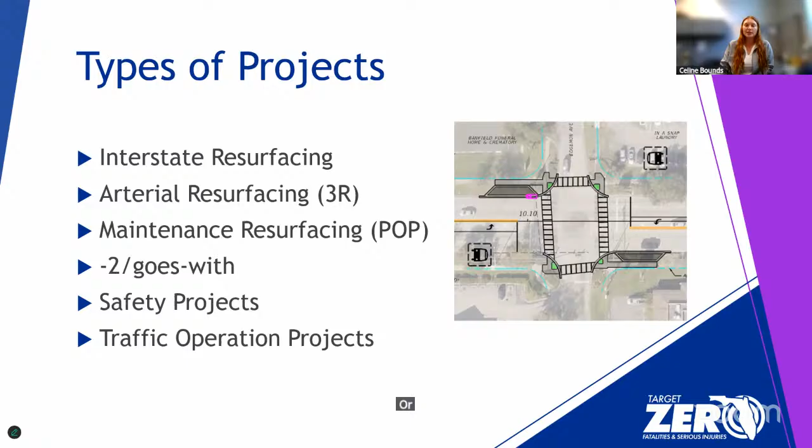Traffic operation projects are projects that have been identified and studied by a traffic ops group. These include things such as speed limit changes, new signalized intersections, directionalizing median openings, or installing signalized mid-block crossings.

Next, we're going to talk a little bit about our process and hit on some of those things we discussed in the last slide. So ISR is our interactive scope review meeting.

This meeting is made up of FDOT technical staff. These people are all our technical strong arms. We invite them to an in-person meeting where they can provide us technical feedback on our draft concept for our scope and highlight anything that we missed. It's important that we have this as an in-person meeting so we can discuss anything that has come up from our local agencies or direction from other departments, so they have the background as to why the scope is to whatever degree of safety that's presented.

Next, we have our TRM meeting, which is our technical review meeting. This is an in-person meeting for the purpose of engagement. It is made up of our cost center managers and our leadership. They are responsible for determining the scope of work.

So we present that safety and corridor review. Every project that is an arterial resurfacing, whether it is POP or 3R, our team conducts a safety and corridor review, which includes looking at crash data for correctable patterns that may be applicable to our resurfacing program.

And we present that information to our cost center managers and our leadership. We do have our traffic operations and our safety office in the room. They are able to inform us of any overlapping studies or may respond to some of the correctable crashes that we've noticed, and potentially partner with us to implement a traffic ops or a safety study into our project.

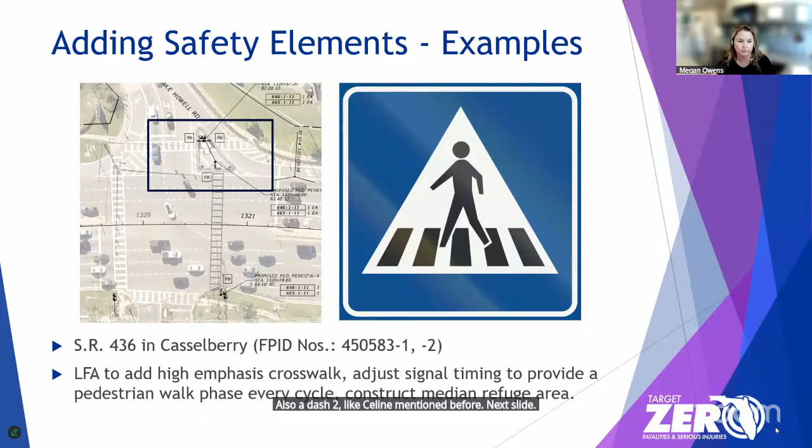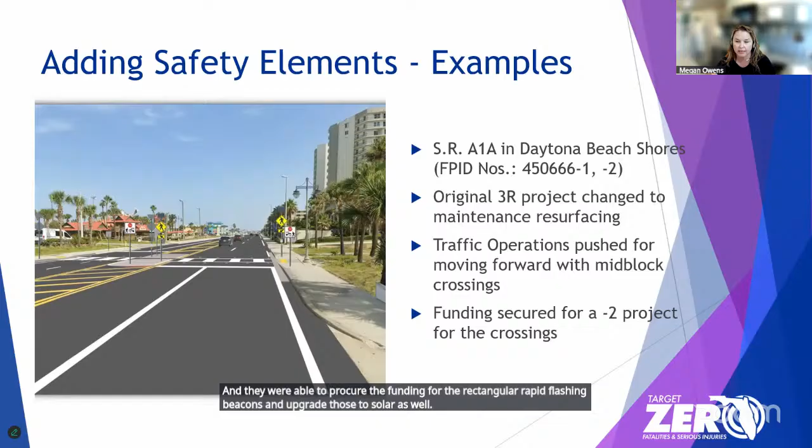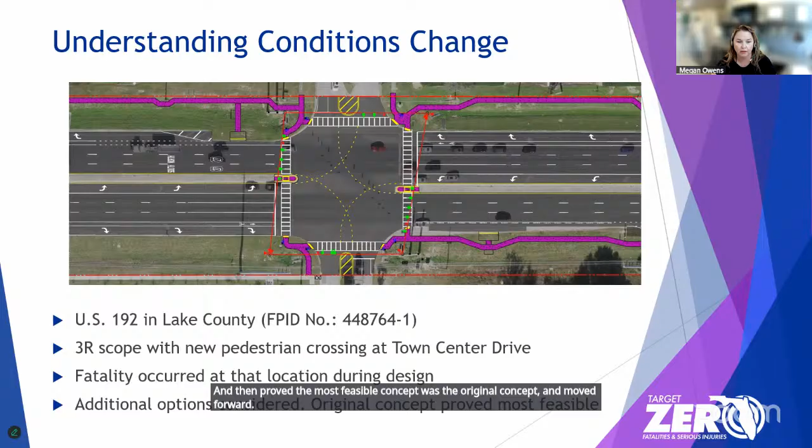To help ensure continuity from design to construction, pass the torch meetings are being conducted to ensure that construction staff and contractors understand the purpose of the project design and why specific features have been included. Additionally, our project managers will pass along any coordination or conversations that we had during design with the local agencies so that they can benefit from this knowledge as well. We understand that introducing new safety features can create some tension within the community, and FDOT is making an effort to stay involved with the community and incorporate those lessons learned from one project to the next.

During the design of a project, we continue to coordinate using tools like graphic renderings and videos of proposed improvements, and we also include the safety office to ensure that local agencies are informed and receive educational material about the safety features being included in their projects. All of this is done to make sure that the project fits the vision of the community and is successful throughout design and well after construction is complete.

And we would like to end on a safety second, because it takes just a second to be safe. Next week starts a speed enforcement campaign across the Southeast states called Operation Southern Slow Down. And that's it. Thank you.

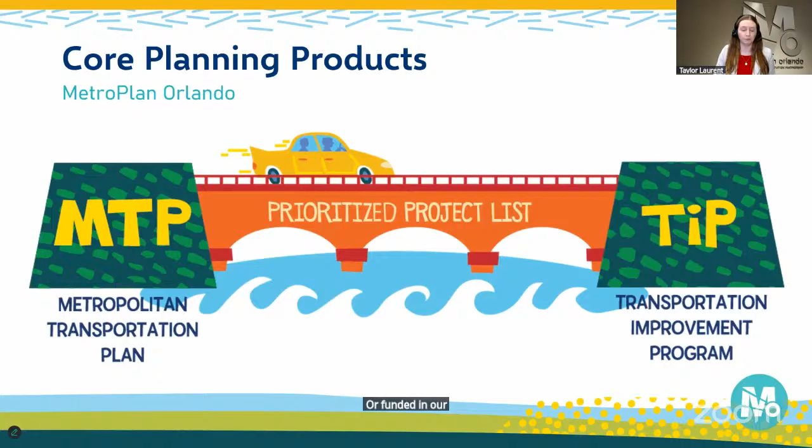Now, the 2050 MTP is made up of 5 basic parts. The first being how we use our transportation system today, looking at and evaluating the background data and existing conditions. From there, we need to develop shared goals and objectives for how we want the transportation system to be in 2050, those 25 years from now, and exploring the drivers of change or the future trends that will influence the path that we take to achieve those goals.

A lot of the technical analysis performed is intended to help us develop a transportation needs assessment to ultimately create a cost feasible plan outlining which of the identified transportation projects could feasibly be accomplished within this 25-year planning horizon. And of course, including public and agency participation and feedback throughout the entirety of the process, so that we have consensus when the plan is ultimately adopted by the MetroPlan Orlando Board.

That adoption will be later this calendar year. Now, safety has been included in our long-range planning process for decades, like I've mentioned earlier, but we purposefully ramped up our efforts in 4 key areas of the 2050 MTP to be able to incorporate the excellent work from our recently completed Vision Zero safety action plans.

That includes in our goals and objectives, technical analyses and needs assessment process, as well as in the development of the cost feasible plan and the funding policy used to create that. I'll be highlighting exactly how we've incorporated and elevated safety for these 4 topics over the next several slides.

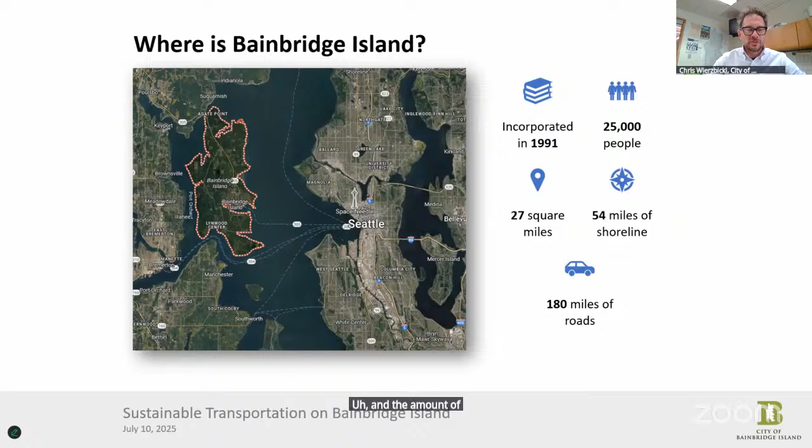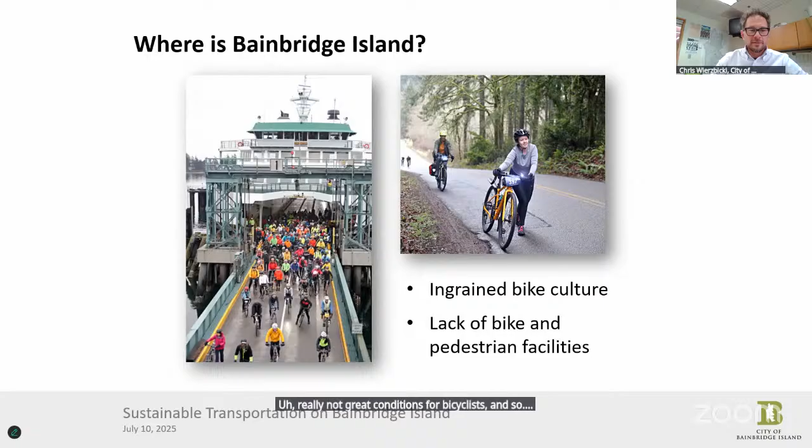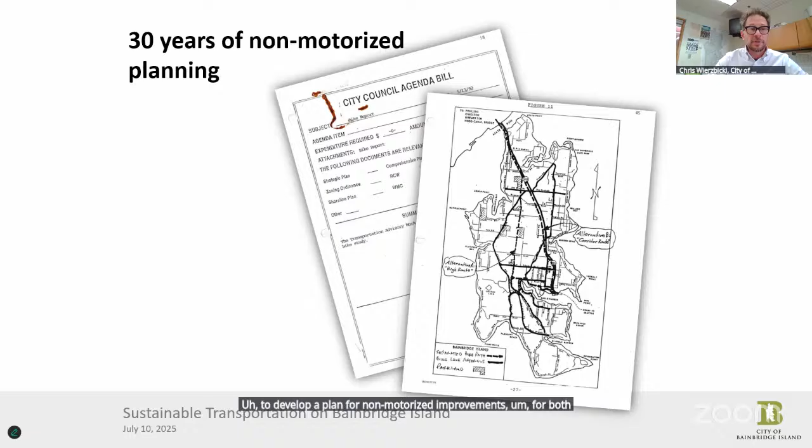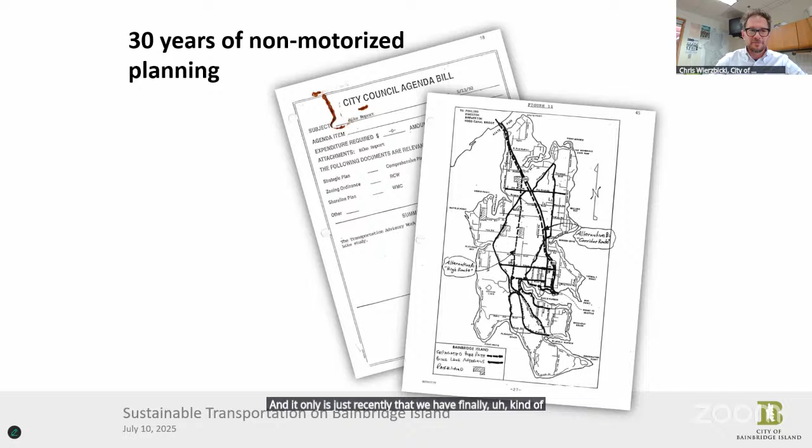And so we have been working on plans and process. We've been working since the city was established back in 1991 to develop a plan for non-motorized improvements for both bikes and peds and trails as well. What's interesting about our community is that we're not growing super fast, we're not building a lot of new roadways. So really, we've been having discussions about how to treat our roadways effectively and make them safer for a long time. It's only just recently that we have finally kind of agreed on a strategy, and that's a little bit of what we're going to talk about today.

The strategy that we developed was through a plan called our Sustainable Transportation Plan. We started that work in 2020, adopted it in 2022, with the vision to reduce carbon emissions and improve safety and mobility for all within the community. It has a focus on complete and connected networks that enhance the island's natural systems and articulates a pathway to implementation. That is a unique element of this plan that we're going to talk about in a minute.

We had lots of community engagement leading up to how this plan was developed. Of course, COVID happened right in the middle of our community engagement process, so we had lots of online meetings to get people involved. We did all-island mailers, and really tried to tap into advocates and others in the community who were passionate about this issue to develop the plan and put it together.

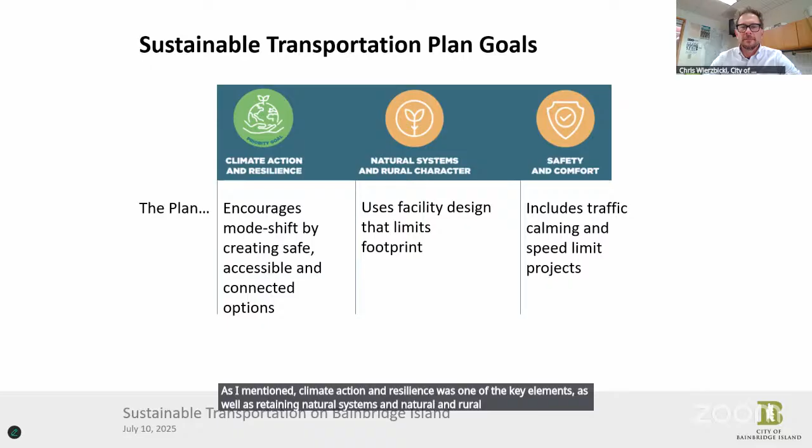The plan ended up having a number of goals that we developed with our city council prior to developing the full plan. This was the guiding elements of the plan. As I mentioned, climate action and resilience was one of the key elements, as well as retaining natural systems and the natural and rural character of the island. Safety and comfort is of course there as well, followed by equity and accessibility.

One of our goals was to try and build what we call all ages and abilities facilities for most of our major projects, which is a bit of a different tactic than we had taken previously, where we were just basically building widened shoulders. We're doing our best to make the system connected and convenient, and having a plan for implementation and funding.

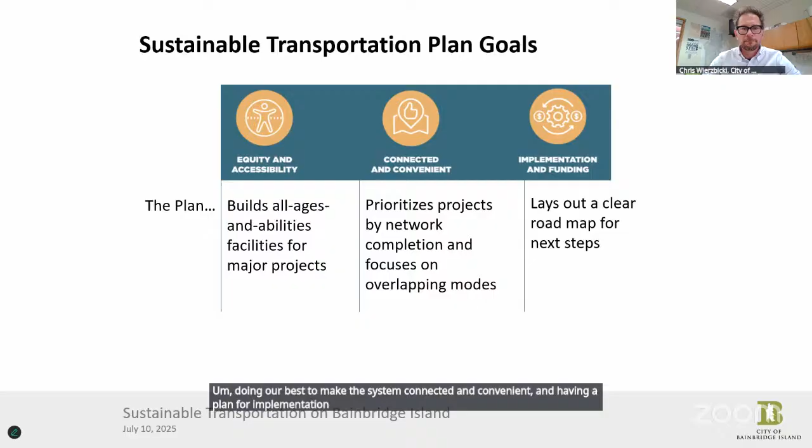The final document actually ended up being 2 documents: the Sustainable Transportation Plan itself, which is a great visual looking document that we'll have a quick look at, and a series of working documents, which included some more detailed maps of the types of and locations for projects, the prioritization, as well as potential project costs.

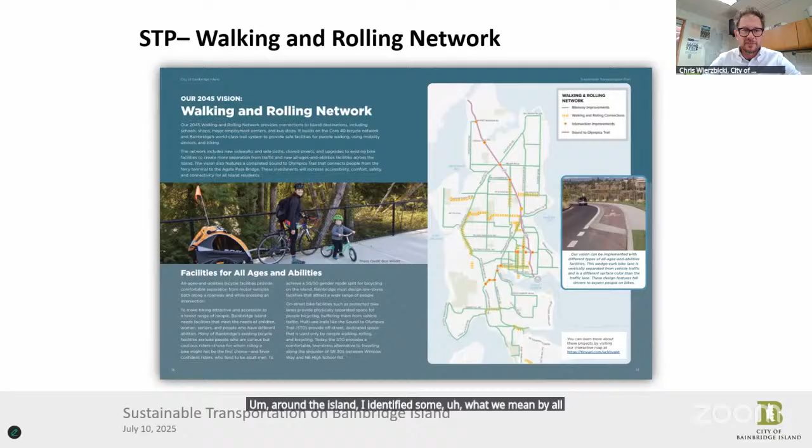Within the plan itself, it looks something like this. It's really an online-focused plan with lots of visuals and graphics. We identified our walking and rolling network around the island, and identified some of what we mean by all ages and abilities facilities. The plan basically summarizes with 3 different scenarios that we presented to our city council for deliberation and decision.

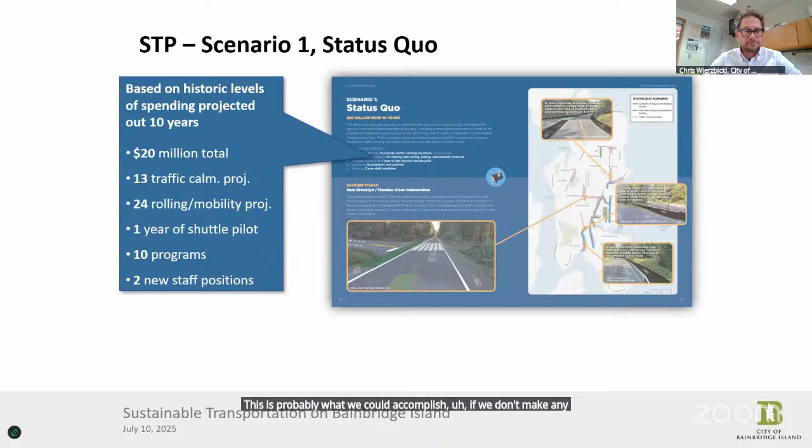Scenario 1 was what we call the status quo. These were basically 10-year plans, along with budgetary requirements for getting the projects done. You can see the map here shows a bunch of different locations for projects and project types. The status quo is essentially looking back at what we had done the last 10 years and saying, if we just take that same approach and apply the same amount of funding, this is probably what we could accomplish if we don't make any significant changes to how we do things.

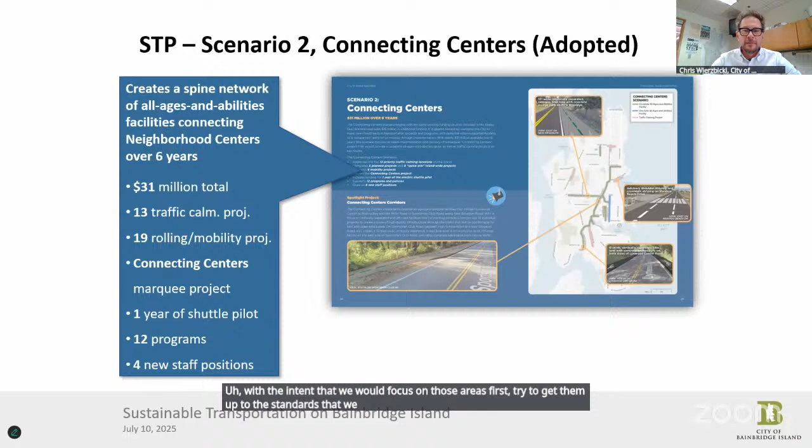Scenario 2 was something called the Connecting Centers option, and this is the option that was eventually adopted by the council and that we are currently implementing. This was a 6-year plan with a larger infusion of funding, and it envisions a spine network of all ages and abilities facilities connecting our neighborhood centers and major destinations like schools and parks, with the intent that we would focus on those areas first, try to get them up to the standards we'd like to have, and then build smaller connections to that spine network after that 6-year period.

The last scenario that we considered but did not adopt was what we call the island-wide stretch. If you look at that map, you see a lot of project locations, but these are lower grade projects, things like traffic calming, just expanded shoulders, not necessarily all ages and abilities facilities. If we had chosen this option, we really would have had a hard time prioritizing these options and getting the community buy-in. So I think we're on the right track, having built and trying to build our spine network.

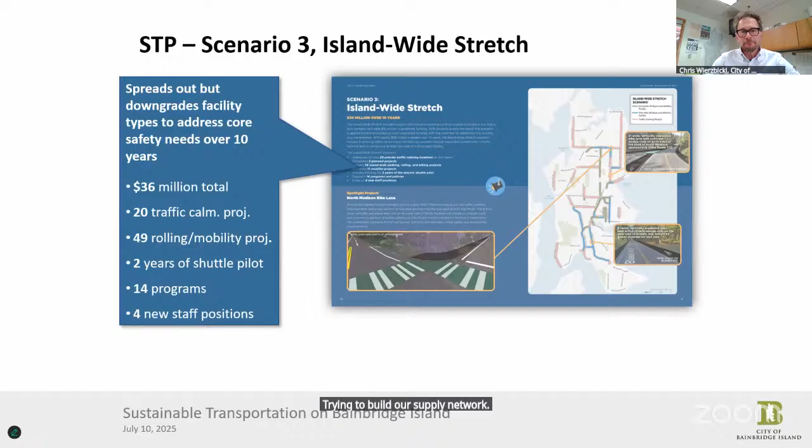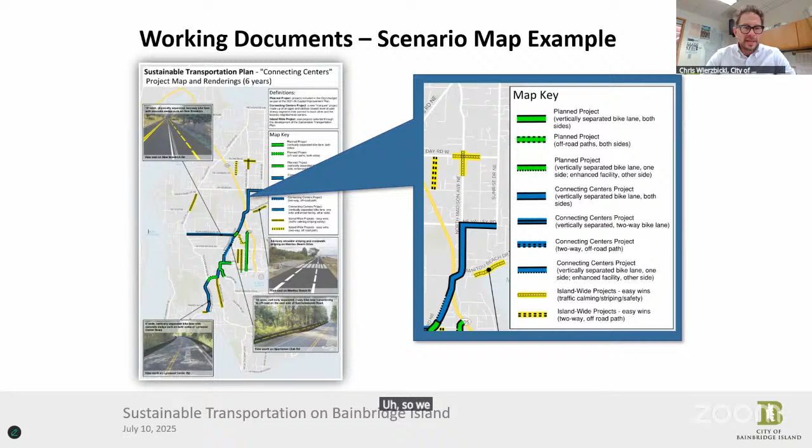The working documents really dive into the details of these scenarios. These are examples from the adopted Connecting Centers plan. As you can see, we identified corridors and identified some early facility types for those corridors as well, so we had some way to cost out the projects and try to prioritize them.

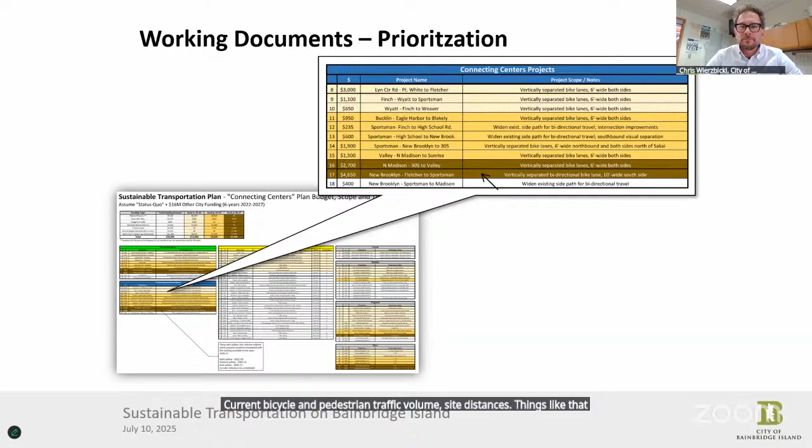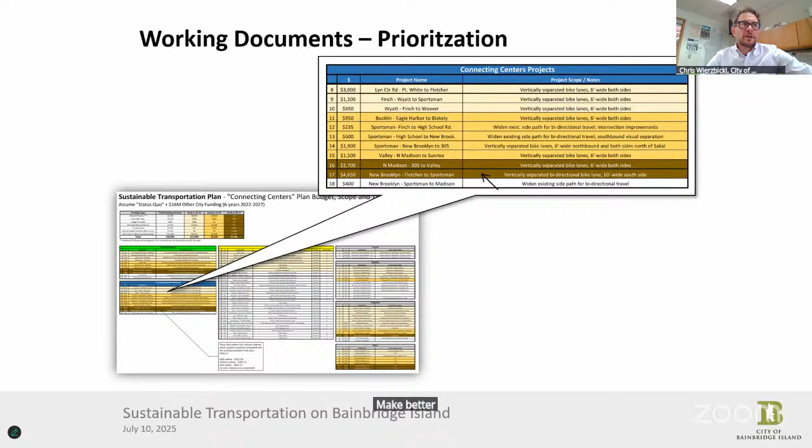It also included long, lengthy lists of all the projects and their prioritization. We prioritized them by things like destinations, current bicycle and pedestrian traffic volumes, sight distances, and things like that, to be able to provide a real prioritized list. This is something we didn't really have before, and it has really been key for us to make better, more efficient progress on delivering projects, because people know what we're going to do next and where we're going next.

The plan also includes a series of programs and policies, not just a list of projects. Things like taking advantage of safe routes to school programs and rideshare programs, updating our land use code to better represent our desire for non-motorized and multimodal transportation. We also included hiring a new sustainable transportation planning manager for the city to help implement some of these programs.

Looking in depth at some of the projects and programs we've delivered so far, this is a project we just wrapped up, the Bundled Madison Avenue Project. This is what was formerly the city of Winslow, right in the core area of Bainbridge Island. You can see the ferry terminal at the bottom right, the more urbanized area of the island. The project was originally envisioned as just a widened sidewalk in that yellow area and was expanded to include over a mile of non-motorized improvements on one of our major corridors.

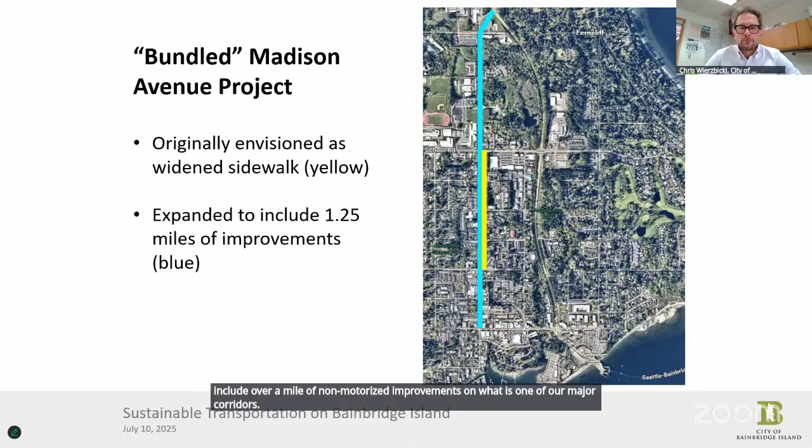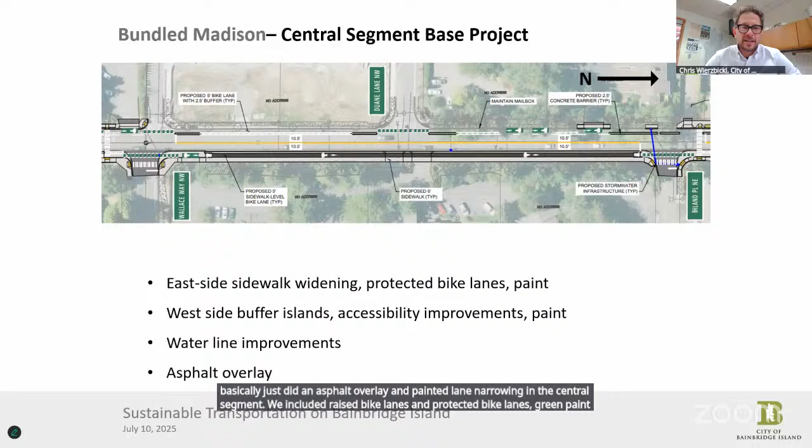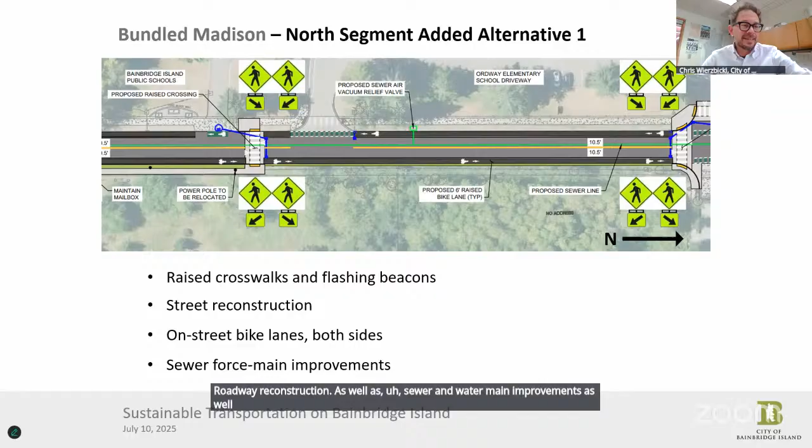It was broken up into segments. On the south segment, we basically did an asphalt overlay, paint, and lane narrowing. In the central segment, we included raised bike lanes and protected bike lanes, green paint, the widened sidewalk, and ADA improvements on the west side of the road. On the north segment, which passes by two school campuses, we included raised crosswalks with flashing beacons, raised bike lanes, and pavement roadway reconstruction, as well as sewer and water main improvements so we could get all those underground improvements done without having to tear up our new road in a couple of years. On the very north end, we just did enhanced striping on a roadway that already had existing shoulders.

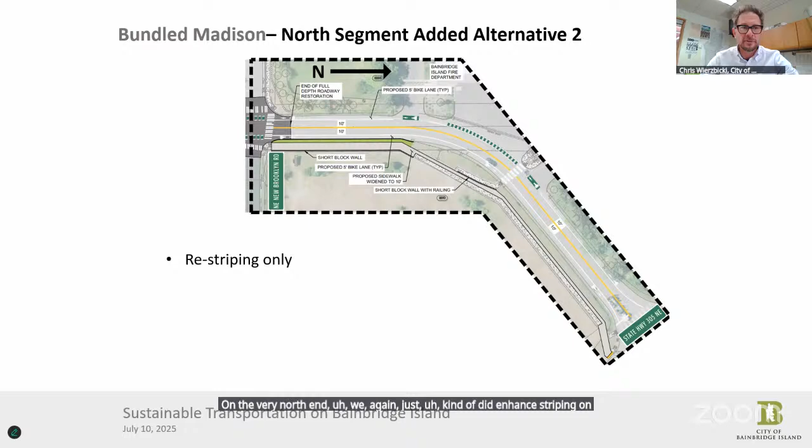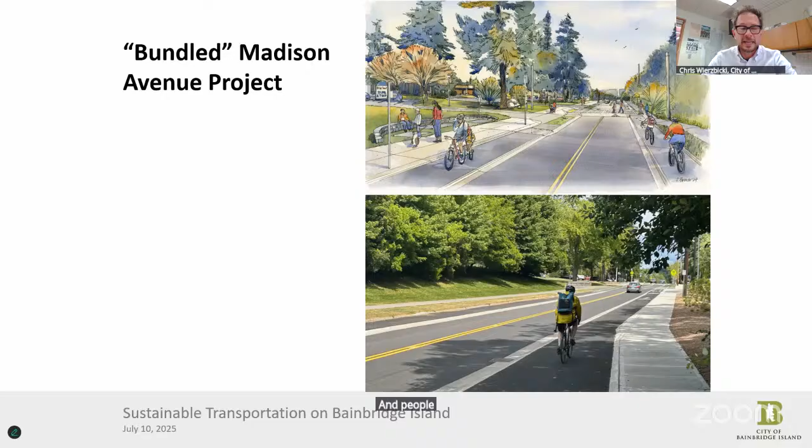This is what it looks like. The top is a segment right in front of our school. You can see what the rendering looked like and what the final product looked like, which came out pretty close. This segment shows a raised bike lane with a wedge curb. We decided to use the wedge curb instead of a standard vertical curb because we have quite a few users of electric bikes now, and people really want to be able to pass people on acoustic bikes. The wedge curb allows folks to enter the roadway, pass somebody safely, and then get back onto the protected lane. People have been pretty happy with it so far, and we've gotten a lot of good feedback.

One of the ways we've implemented this project, different from how the city had done things in the past, is by really bundling lots of different funding sources together. We had both federal and state transportation grants, American Rescue Plan Act grant funds, a transportation benefits district that's basically a charge on car tabs in our city, some general fund contributions, and sewer contributions from our sewer and water utility to get underground improvements done at the same time as surface improvements.

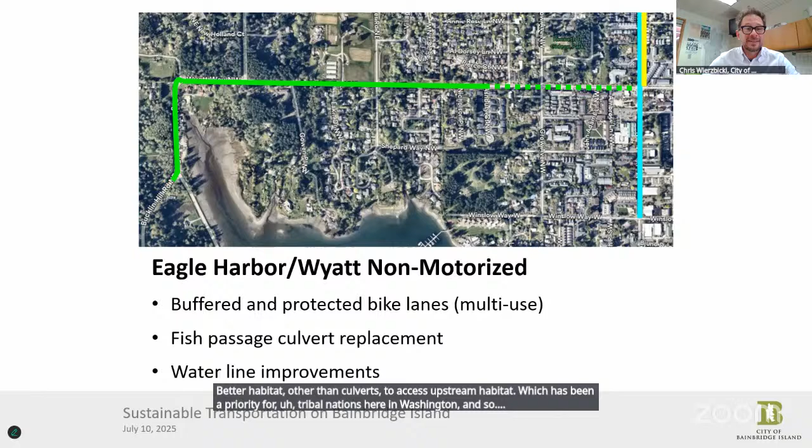The next project coming up is our Eagle Harbor Wyatt non-motorized project. You can see the Madison project over there on the right, the blue and yellow. This is the next segment of our connecting centers, which will connect the south end of the island to town. Again, we're bundling things together, doing non-motorized improvements, fish passage, culverts, and waterline improvements. For those not familiar with fish passage, in Washington we have spawning salmon which need better habitat than culverts to access upstream habitat, a priority for tribal nations here in Washington. So we're replacing a 30-inch culvert with basically a box culvert bridge.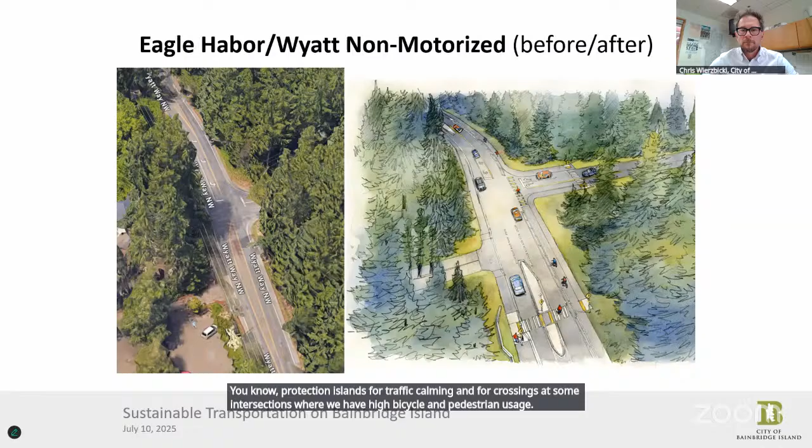The project also includes protection islands for traffic calming and for crossings at intersections with high bicycle and pedestrian usage, something we've had success with. We're also implementing our raised bike lane configuration again. In this case, we have a grass median next to our existing sidewalk that we're converting and paving into a raised bike lane, which has saved us some money and will also provide a good level of protection for bicyclists.

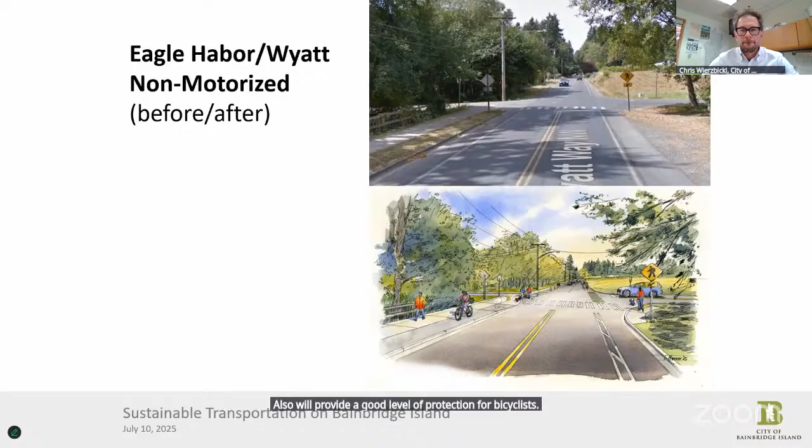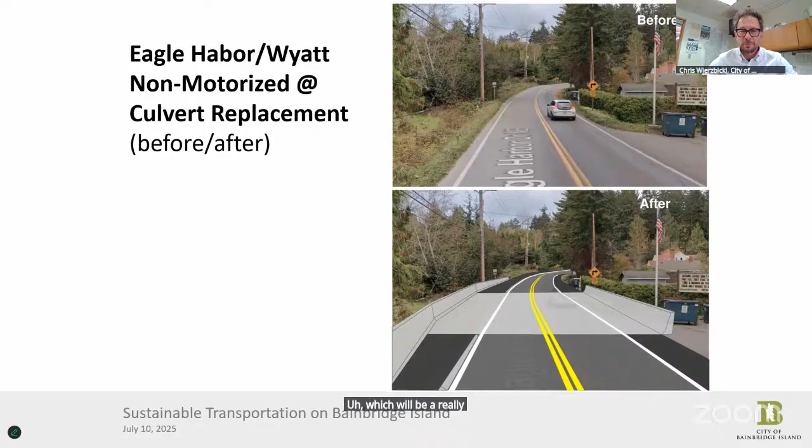Here's a picture of the fish passage. This is a real pinch point in the corridor. You can see on the top there's barely any shoulder, and we have about almost 9,000 vehicles a day coming through here. And believe it or not, people walking and biking, including myself, who bikes to work every day. So the fish passage culvert will provide us a protected bike lane on the southbound side and a buffered shoulder on the right, which will be a really significant improvement for this pinch point in the corridor.

As I mentioned, we're bundling things together for this project as well. We've got a number of different grants lined up, our general fund contributions, and the Stormwater Fund contributing for our fish passage. And of course, we're doing some water line improvements here too, because every place where we plan on replacing a road, we pretty much have something underneath the road that's old and also needs to be replaced.

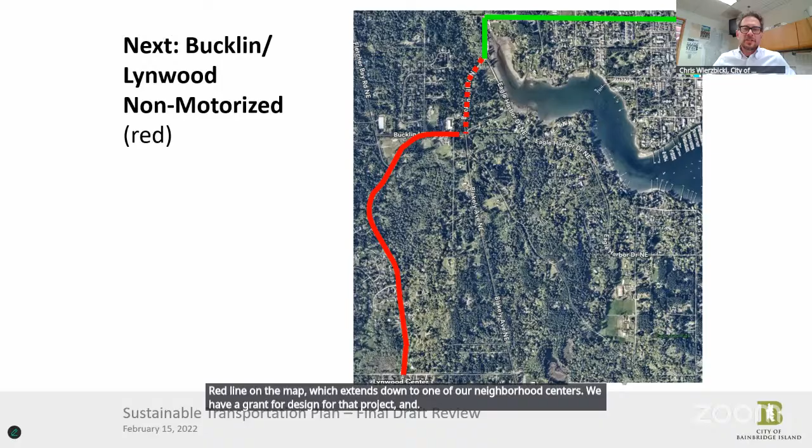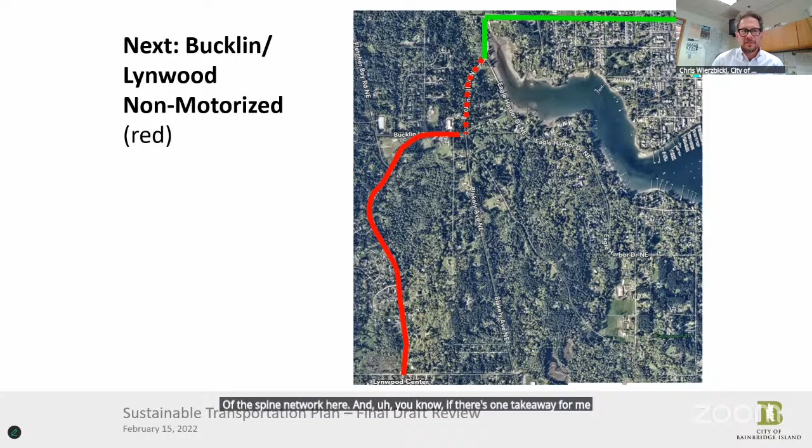And if there's one takeaway for me from this work we've done with the plan, it's that it's really helped focus people and cut down the time that we've been spending on trying to decide where to do projects, as opposed to just focusing on getting them designed and delivered. Because the spine network is, you know, everyone's kind of agreed that that's what we want to do first. So we are just proceeding along those lines as quickly as we can.

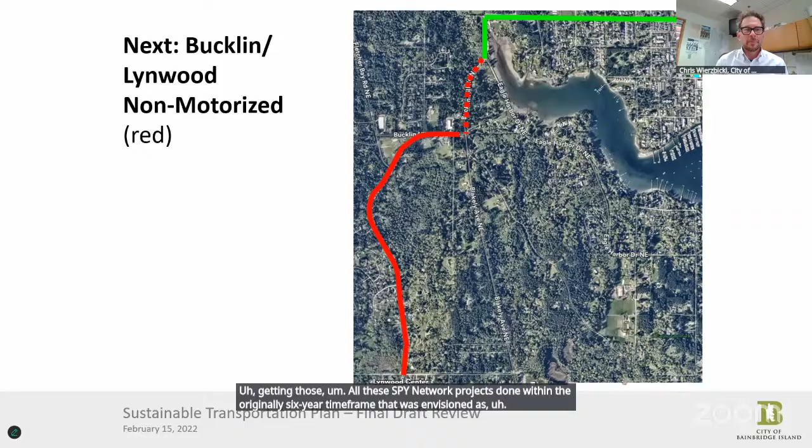Getting all these spine network projects done within the originally 6-year timeframe that was envisioned is probably going to be a challenge. We did not bring in the funding that we really needed to accelerate those projects. But regardless, we are designing and delivering projects along that corridor, and trying to make the best of the resources that we do have.

So I had a couple of additional slides here, but I'm going to stop here because it's 9:45, and I think I've expressed a good piece of what I had to say. So thank you again for this opportunity. Looking forward to some questions.

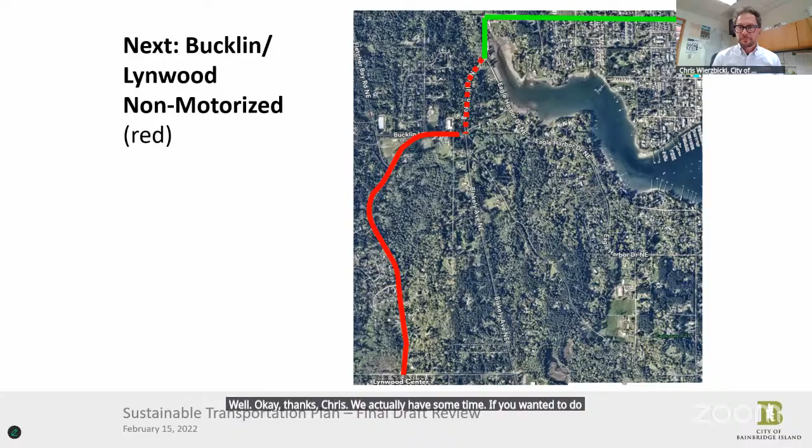Okay, thanks, Chris. We actually have some time if you want to do the rest of your slides. We have a ton of questions in so far. Maybe give people a few more minutes if they would like to ask additional. Sure, I'll just take a couple more minutes here.

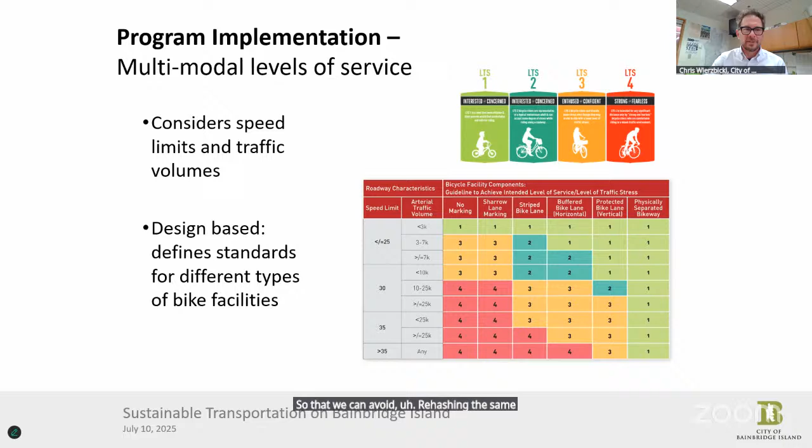I think what I had next was to talk about programs. Some of the programs we are implementing are related to policy and programs. We've adopted some multimodal levels of service in our new transportation element of our comprehensive plan, which guides all of our land use and transportation for the city. This was a great tool to get some community input on the types of facilities that we want on different types of roadways. Again, trying to bring people together to have a common understanding of what we're trying to achieve, so that we can avoid rehashing the same decision-making process every time we come up with a new project.

We developed a facility typology, so we have common language about the types of facilities we're building for non-motorized facilities. Again, it's another way to just kind of get people on the same page about what it is we're doing.

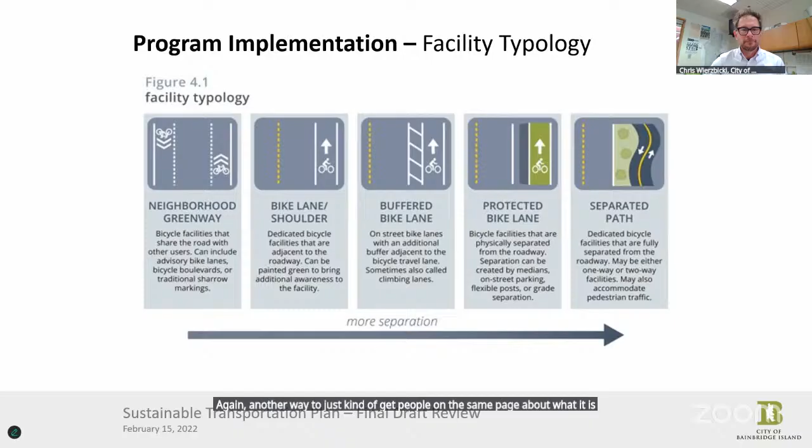And lastly, we're also really trying to focus on spot projects. We have an operations and maintenance crew that does lots of great work on our roadways, but haven't done a lot of minor shoulder improvements and grading and things like that, just because we're really strapped for resources. But once a year, we at least try to use our in-house crew just to do some really basic work in areas of high need.

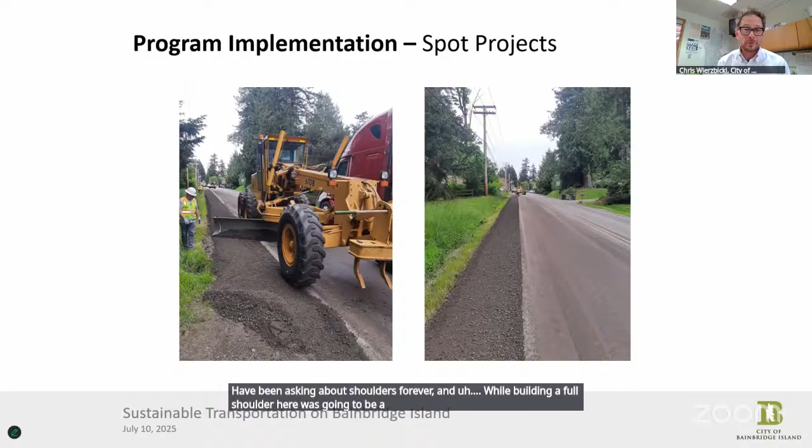This is one of our neighborhood centers where people walk to and from retail and commercial areas from their neighborhoods, and have been asking about shoulders forever. While building a full shoulder here was going to be a real challenge, we were able to build a short refuge area for pedestrians walking in this location with our own in-house crew. That's gotten a lot of positive feedback from folks. I think folks like seeing their city employees out making improvements in the community, and it's built some goodwill as well.

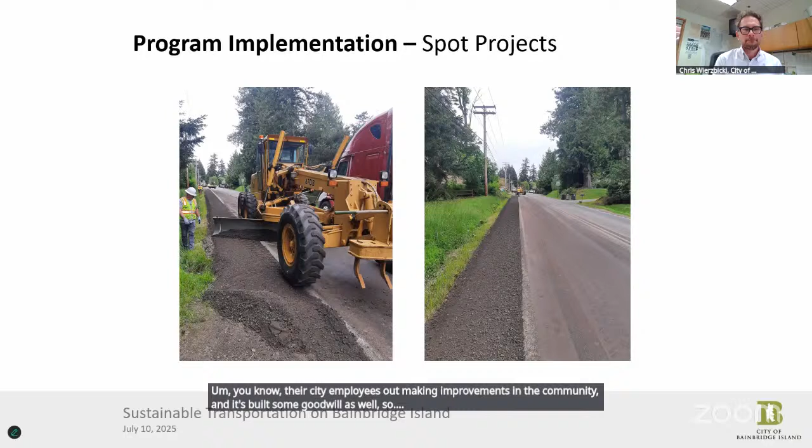Maybe we have a question here. Let's see. We have a couple. Are you done? Yeah, that's fine. We'll stop there. All right, that sounds good.